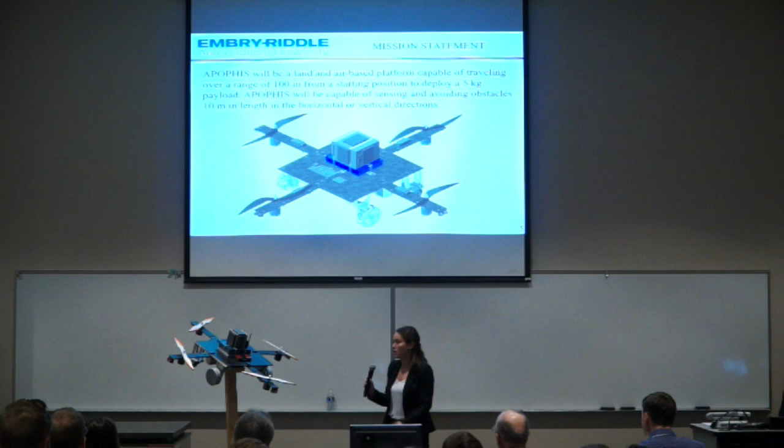Now I will discuss the mission concept. APOPHIS will be an autonomous land and air-based payload delivery platform capable of transporting a 5-kilogram payload to a user-defined target position. APOPHIS will also be able to detect and maneuver around obstacles that are less than 10 meters in length in the horizontal or vertical directions. Shown here is our CATIA rendering, in addition to our 2-scale mock-up here.

Now I will discuss our system objectives. Primary system objectives are defined as objectives required for mission success; if these are not satisfied, it constitutes mission failure. The first states the platform should travel both on land and air to a target location. The second and third state the platform should deliver a 5-kilogram payload to a target location and then return to the starting location without the payload.

The fourth and fifth objectives state the platform should travel a distance greater than 50 meters but less than 100 meters from the starting location. The sixth primary objective states the mission should have more than one form of independent propulsion, in addition to more than one method of attitude determination and control. The ninth primary objective states the platform should complete the mission inside the mission envelope.

Now moving on to our secondary system objectives, defined as expected but not required for mission success. The first two state the platform should be able to maneuver around obstacles less than 10 meters in length in the horizontal or vertical directions. The third states the platform should achieve an altitude less than 25 meters during the course of the mission.

Now moving on to our tertiary objectives, defined as desired but not required for mission success. The first states the platform should complete the mission in full autonomous mode, and the second is that the platform should be fully validated by April 28, 2017, the date of our system validation review. Now moving into our concept of operations, as mentioned, APOPHIS is broken into 4 subsystems.

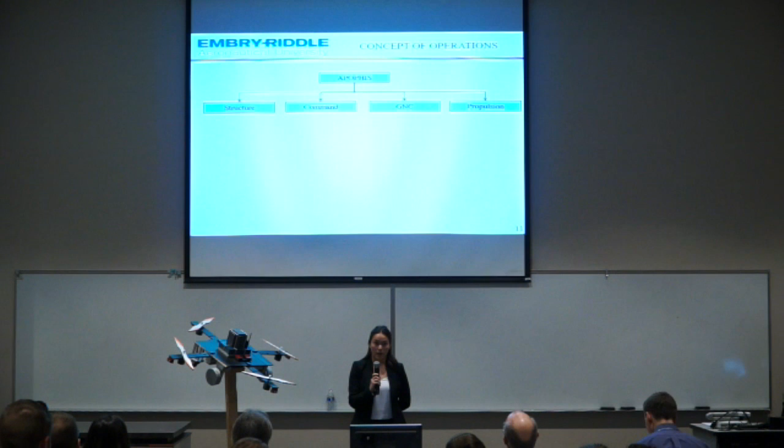And now here is an animation. This animation shows two types of obstacles that APOPHIS will be able to maneuver around. The first is an obstacle that is less than 10 meters in the horizontal direction but more than 10 meters in the vertical direction, shown here. The second obstacle is greater than 10 meters in the horizontal direction but less than 10 meters in height, shown there. The animation begins with APOPHIS leaving the starting location.

As it approaches the first obstacle, it will detect it when it is perpendicular to it, turn to maneuver around the obstacle. Once it is around the obstacle, it will return to the center position to continue on its trajectory.

As it approaches the second obstacle, now switching views to see behind the obstacle, it will turn one direction and travel 10 meters. At that point it will still detect the obstacle, so it will return to the middle position where it first sensed the obstacle and travel 10 meters in the opposite direction. At that point it will still sense the obstacle, so it will return to the center position where it first sensed the obstacle and fly over the obstacle to continue to the target position, where it will deploy the payload.

And then maneuver back to the starting location using an optimal route.

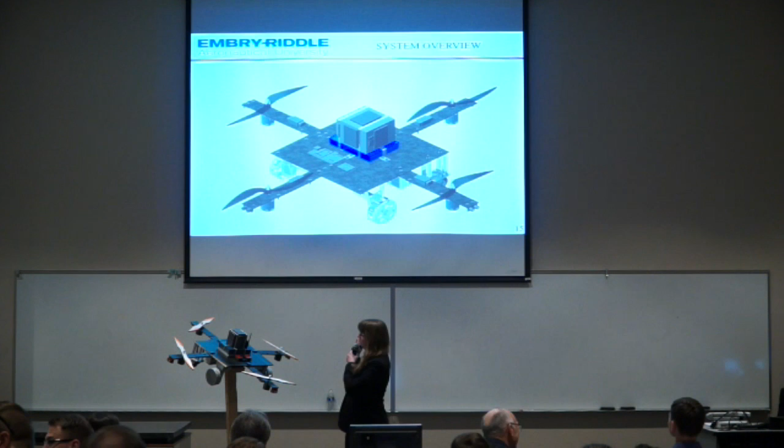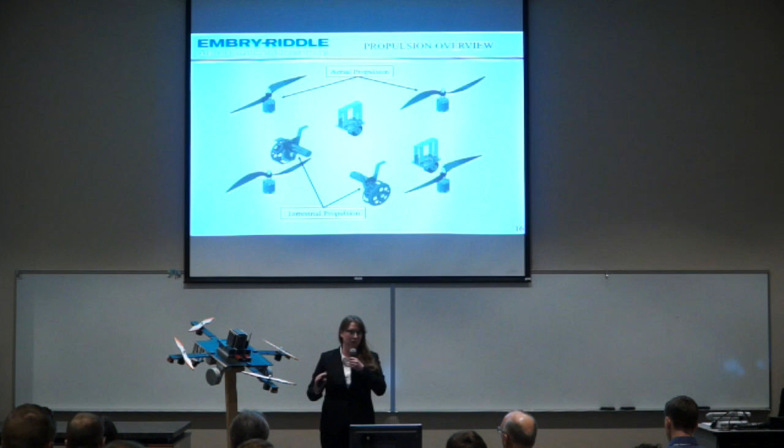So once again, this is the overview of our CATIA model, but I will be referencing our mock-up. First is the propulsion subsystem. Propulsion is first because it really is what drove our design. We have 4 aerial motors, including counter-rotating propellers connected on top, located at the end of each propeller strut. The terrestrial component is the ground motors, located in the front to give us front wheel drive, along with differential steering underneath the platform. The back wheels are freely rotating wheels to allow us to turn.

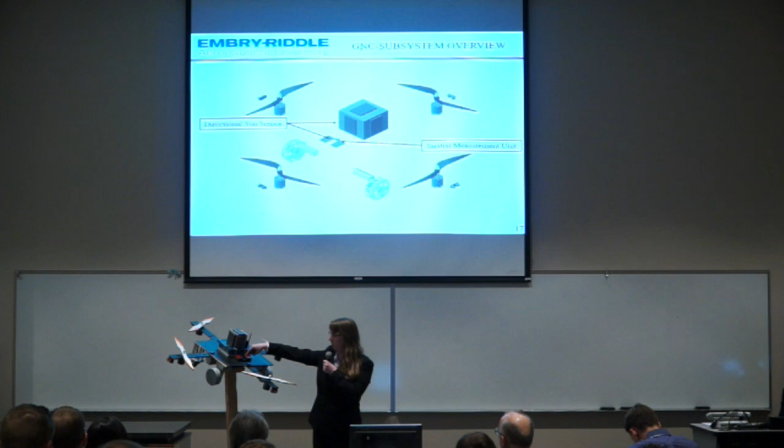Next is GNC. GNC is in charge of attitude determination, attitude control, and guidance and obstacle detection. For attitude determination, they have an IMU located on the electronics panel in the center of the plate, and a solar panel array located on top of the batteries so there will not be shadows cast on it, which gives us a sun vector. For control, they use propulsion's motors: the air motors for aerial control and the ground motors for ground control. For obstacle detection, we have 4 ultrasonic sensors, one located at the end of each propeller strut. And for guidance, we have a GPS located on the central electronics board.

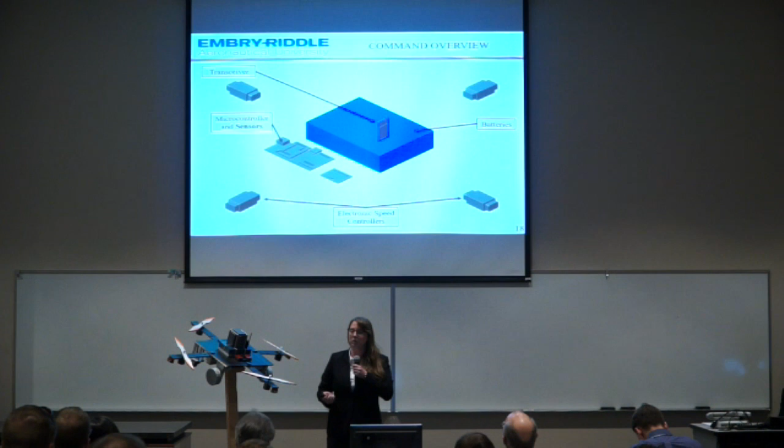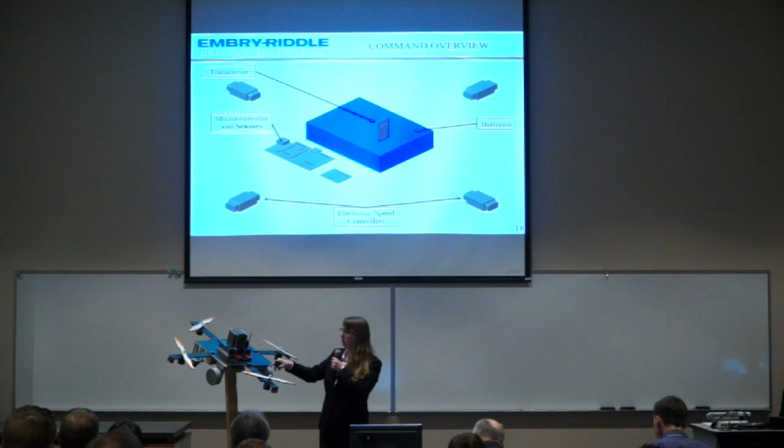Command is in charge of powering the system, data processing, and communicating with the ground station. They power the systems using 4 batteries located in the middle of the plate. For data processing, they use a microcontroller located here. For communicating with the ground station, they have a radio located here next to the solar array. They also have electronic speed controllers to regulate the voltage that goes to our air motors to ensure we get the correct amount of thrust.

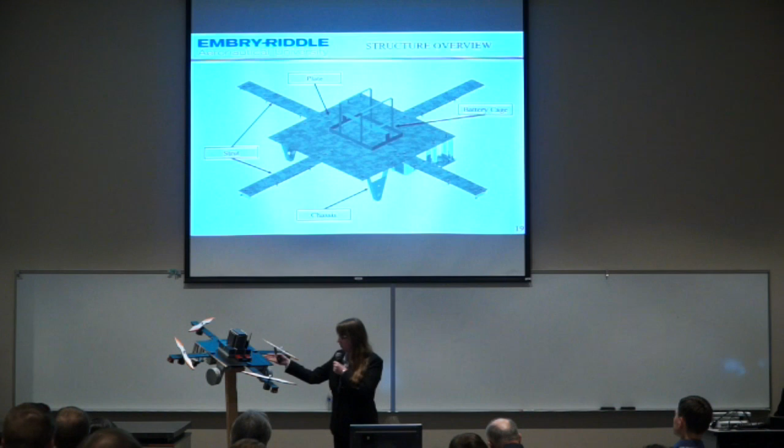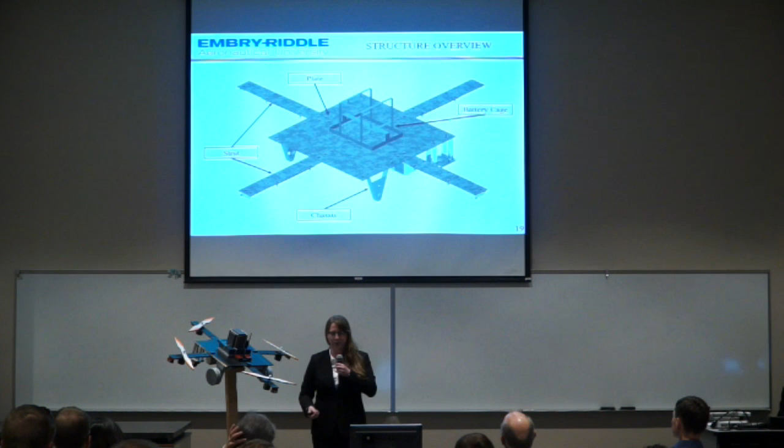Last is structures. Structures is in charge of containing all the other systems. It has four-ish main components: the main plate and the propeller struts, both made of carbon fiber, and the wheel chassis and payload struts, located underneath the platform, made of aluminum 6061. We are also in charge of the payload and deploying the payload bay. This is done with solenoids located on the payload struts, hooked into a payload bay that will release when we reach our target location. All of this will be discussed in more detail within the individual subsystems.

At this time, I would like to introduce Sean Gilman for the propulsion subsystem.

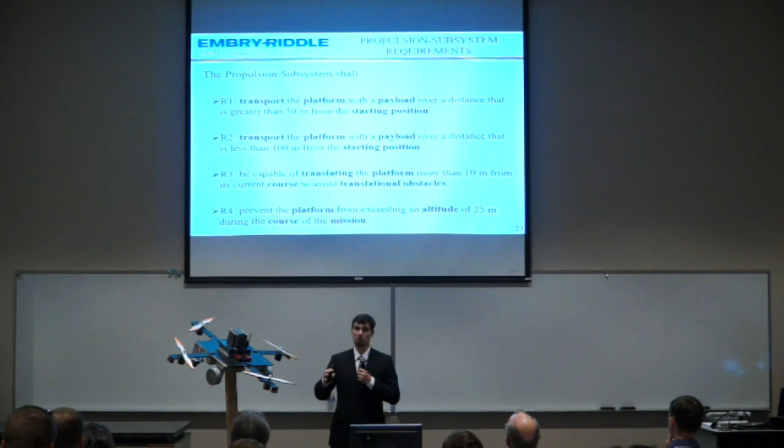Now I'll talk about the propulsion subsystem definition. First, the propulsion subsystem must move the platform with the payload more than 50 meters but less than 100 meters from the starting position. Next, it must be able to translate at least 10 meters out of its expected course, either horizontally or vertically, to avoid any obstacles. And it must keep the platform under 25 meters above ground level throughout the entire mission.

Next, the propulsion subsystem must provide 27 kilogram force of thrust. This is to account for a factor of safety of 1.5, allowing us to accelerate and maneuver around aerially. Then it must provide 0.1195 newton meters of torque for the ground component, allowing us to accelerate and maneuver on the ground.

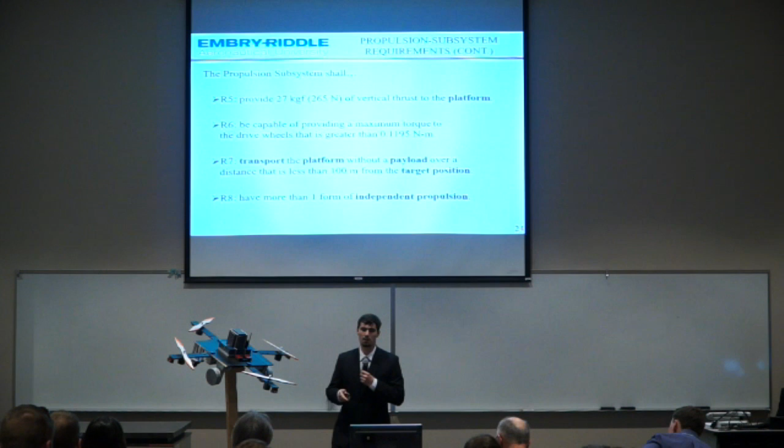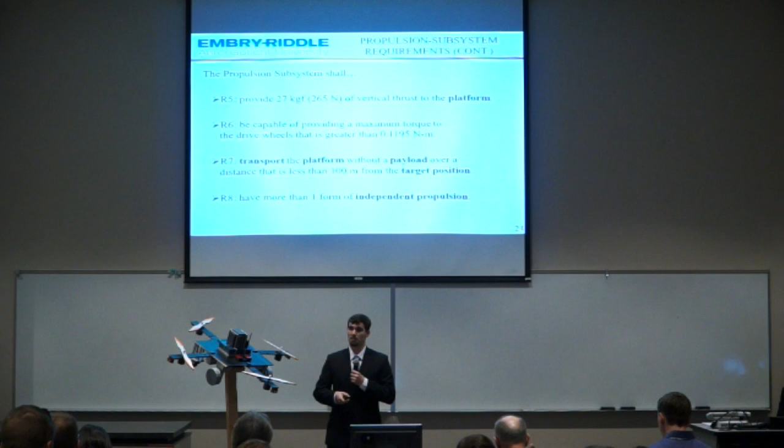It must transport the platform without the payload from the target position back to the starting position, at least 100 meters or under 100 meters. And we must have more than one form of independent propulsion. So from the propulsion subsystem, we derive two different components: the aerial and the terrestrial components.

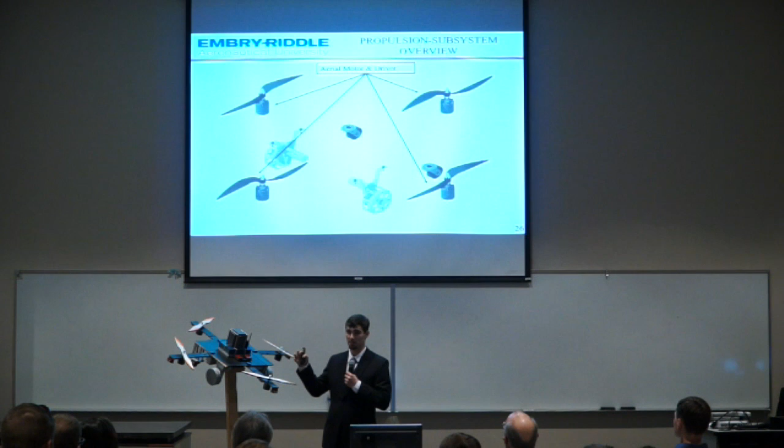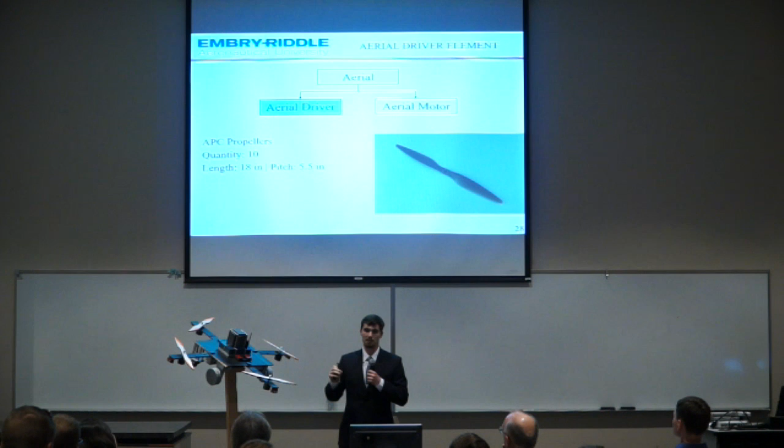Once again, this is the aerial component. For the driver, we selected the APC 18 by 5.5 inch diameter blades. We're getting 10 of these: the first 8 are for the propellers, and we have an extra set so if any break we can replace them. The other 2 are for testing to failure, to see where they'll start to break, since we're testing at the higher end of its factor of safety.

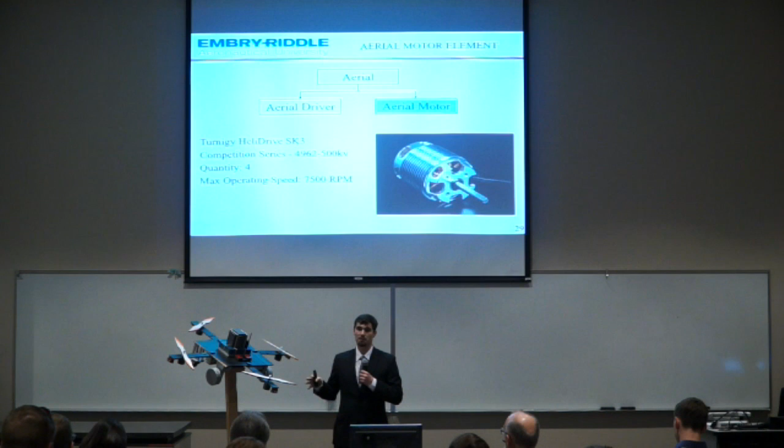For the aerial motor, we chose the Turnigy Helidrive SK3. We're going to be running this at 7,500 RPM max.

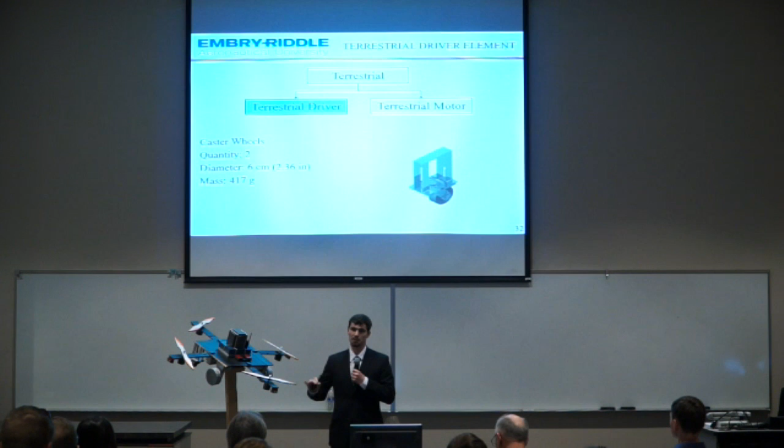This is the terrestrial component. For the terrestrial driver, we chose to mill out our own wheels on the front out of aluminum 6061. For the back, we chose caster wheels, so we can do differential front steering and it can turn freely. For the motor, we chose the Anaheim Automation motor, courtesy of Dr. Gentilini, and each will produce 0.0625 newton meters of torque.

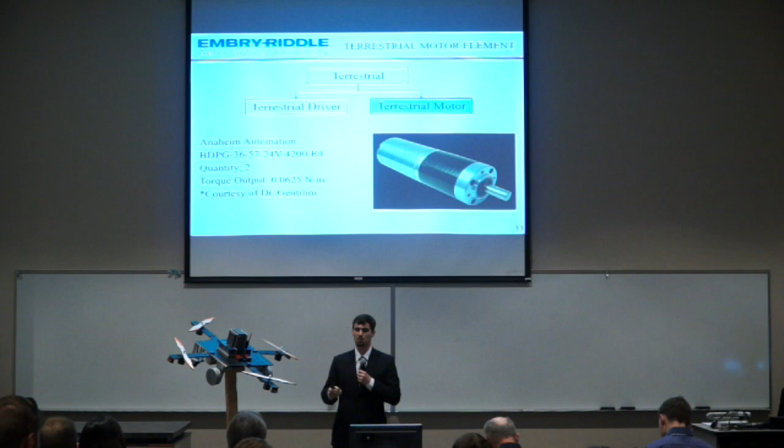Now I'll hand it off to Wesley Stein to talk about the propulsion subsystem numerical validation.

Hello, I'm Wesley Stein, and I'll be talking about the numerical validation of our propulsion subsystem. The first set of requirements deal with the range of our platform, which the propulsion subsystem is responsible for. It needs to travel between 50 and 100 meters initially to reach the target location, the same distance to come back, and it needs to be able to go up to 10 meters to get around any obstacles.

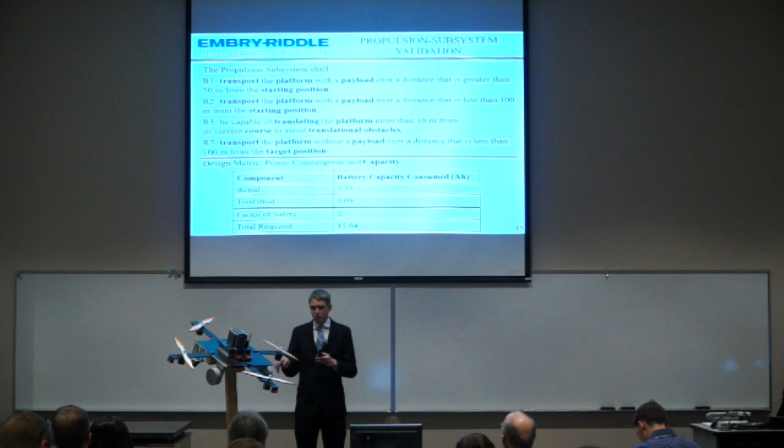The figure of merit we're dealing with here is how much energy we can supply to the motors to reach the required range. The one that consumes by far the most battery capacity is our aerial motors that drive the propellers, expected to consume 7.73 amp hours. For comparison, the terrestrial component consumes 0.09, much less power. So the aerial version has driven our power supplies, which is why there are exactly 4 batteries, one for each of the aerial motors.

We've designed this with a factor of safety of 2, which we meet. This is based on a simulated mission, and we have enough energy to complete the full mission twice in ideal circumstances, which covers that factor of safety.

The next set of requirements deals with the thrust that must be provided to lift our system with the propellers, or aerial component. Early on in the design process, we decided we need a 150% thrust to weight ratio. This isn't only a factor of safety requirement, as the extra thrust beyond 100% is required simply to maneuver the quadcopter, because maneuvering involves running some motors at less than full capacity. We researched the topic and found that 150% is the minimum to make a properly maneuverable quadcopter.

Early on, we decided our design weight would be 18 kilograms, and thus, in order to have the 150%, we have to produce 27 kilograms force of upward thrust with our 4 propellers, which is equal to 265 newtons.

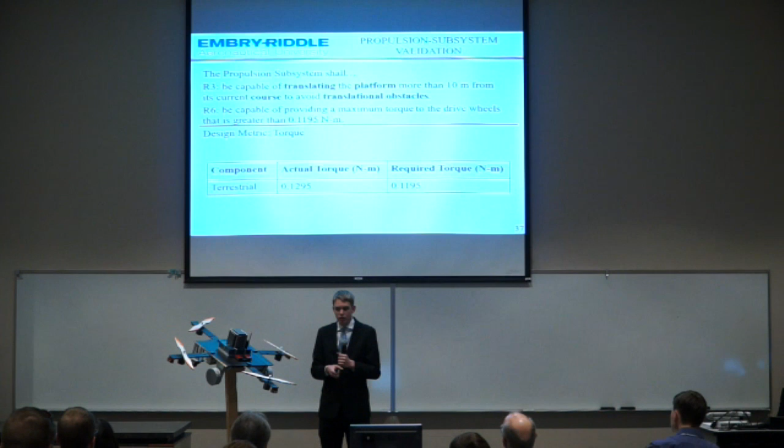The third set of requirements deals with the torque that must be produced by our ground wheels in order to maintain the proper acceleration at a grade of up to 2%. This requires a calculated torque of 0.1195 newton meters. The provided torque is 0.1295, which fulfills that requirement also.

This table simply shows the different requirements and how we have numerically validated them. We used a different kind of computer simulation for each of these, where we ran through a simulated mission and integrated the consumption of battery capacity and power, while also measuring the required thrust and torque in order to determine that we have numerically met all of these requirements.

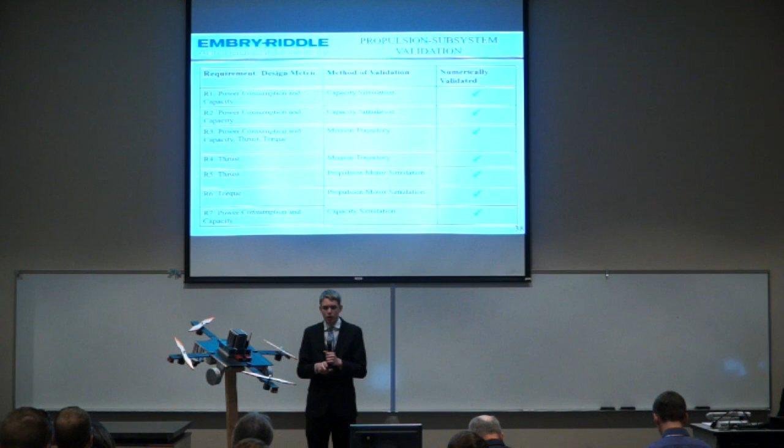I will now introduce Abigail Kuto, who will be talking about our guidance, navigation, and control subsystem.

Thank you, Wesley. My name is Abigail Kuto, and I'll be discussing the Guidance, Navigation, and Control, or GNC subsystem. Joining me in the GNC subsystem is Damien Barraza and Christopher Klein.

First, for the GNC subsystem definition, the requirements are listed above. First, the subsystem shall navigate the platform to a point that is less than 2.75 meters from the specified position. Next, the GNC subsystem shall complete the mission using less than 16 amp hours of battery capacity. The subsystem shall limit the altitude of the platform to be less than 25 meters above ground level.

Continuing on, the GNC subsystem shall navigate the platform around translational obstacles that are less than 10 meters in either length or height during the mission. The last few requirements state that the GNC subsystem shall have more than one method of attitude determination and attitude control for the system.

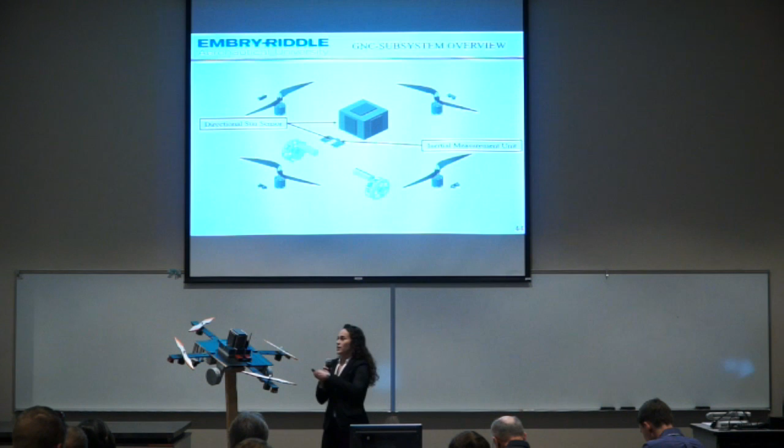Pictured above is a CATIA rendering of all of the elements that comprise the GNC subsystem. The first component is the attitude determination component. There are 2 elements which serve as the 2 methods of attitude determination for the platform. The first is the directional sun sensor, which has an assembly of 5 solar cells mounted on top of the plate here.

There's also an accelerometer mounted on the electronics board here. The second method of attitude determination is the inertial measurement unit, also located on the electronics board. For the attitude control component, there are also 2 elements which serve as the 2 methods for attitude control for the system.

The first element is the air-based controller, which has 4 motors and propellers located on the ends of the propeller struts. The air-based controller element is used to control the attitude of the platform during flight.

The second element is the ground-based controller, which has 2 motors on the ground, driving 2 gear systems, and 2 wheels. Controlling each motor independently enables us to use speed differential front-wheel drive to steer the platform to the target position and around obstacles.

Lastly, the guidance component is responsible for navigating the platform to the target position where it will deliver the payload, and also navigating the platform around translational obstacles. The first element is the position sensor element, located here on the electronics board, which is responsible for determining the current position of the platform.

Next is the obstacle detection sensor element, which has 4 sensors. The first is located on the front propeller strut facing forward. The next 2 are located on the left and right propeller struts, both facing outward. The placement of these sensors enables the platform to detect when it approaches an obstacle perpendicular to the front face, so it may turn and navigate parallel to that obstacle.

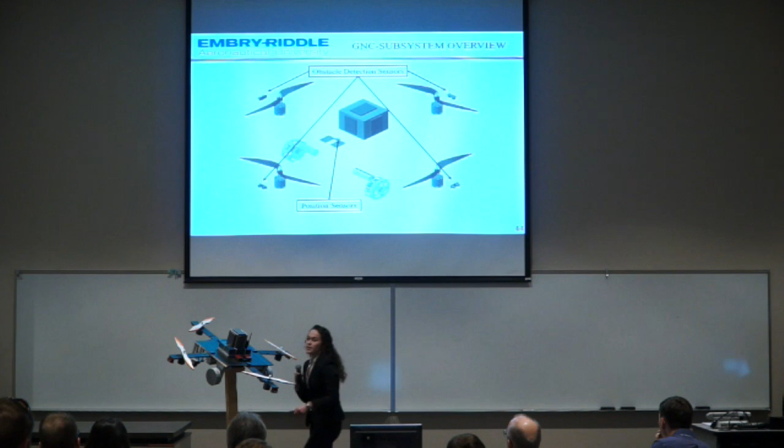Once it passes the obstacle, it can turn again and maneuver around the obstacle to continue to the target position. The last sensor of the obstacle detection element is located on the back propeller strut. It's facing downward, which enables us to detect when we've maneuvered over an obstacle, so we may continue the descent and continue to the target position.

All of these elements comprise the 3 components of the guidance, navigation, and control subsystem.

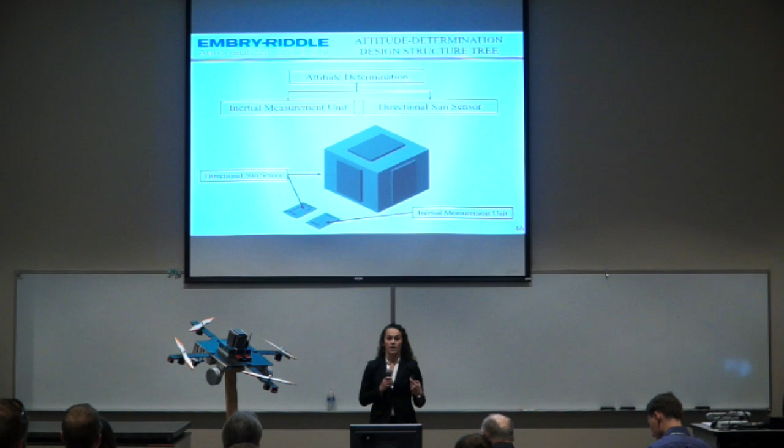First, the attitude determination component has 2 elements: the inertial measurement unit and the directional sun sensor. The inertial measurement unit we've chosen is the BMI 160, which has a 3-axis accelerometer and a 3-axis gyroscope. We'll also use an external 3-axis magnetometer located on the sensor booster pack shown above. That magnetometer gives us a heading angle, used to determine our attitude and help us navigate throughout the mission.

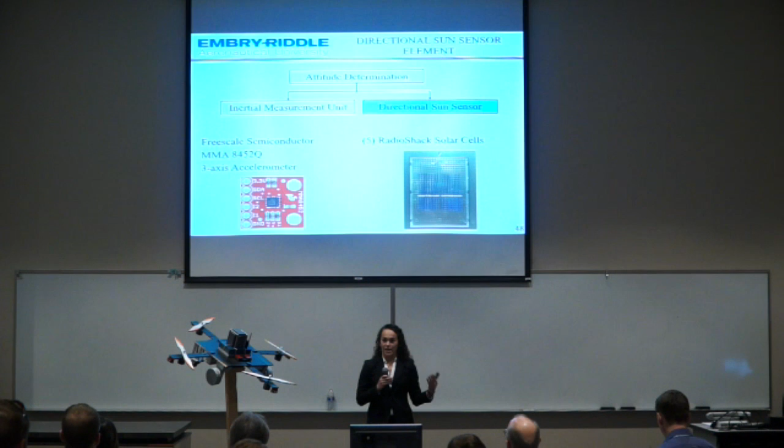The second element of the attitude determination component is the directional sun sensor. We'll be using 3 RadioShack solar cells on this assembly, which give us a vector from the platform to the sun. The second vector measurement is the 3-axis accelerometer located on the electronics board, which gives us a gravity vector downward. These 2 vector measurements give us the second method of attitude determination for the platform.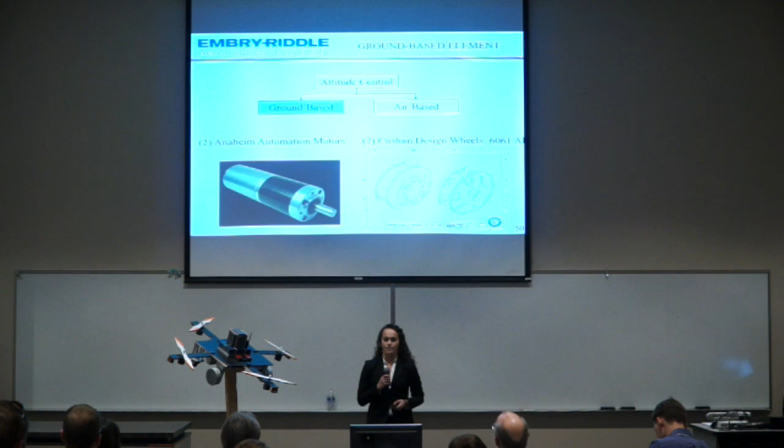Moving on to the attitude control component, there are 2 elements: the ground-based controller and the air-based controller. For the ground-based controller, we've chosen to use the hardware already picked out by the propulsion subsystem as our actuators to steer the platform on the ground, consisting of the motors and wheels shown above. For the air-based controller, again for our actuators, we will use the hardware chosen by the propulsion subsystem: the 4 motors and their propellers.

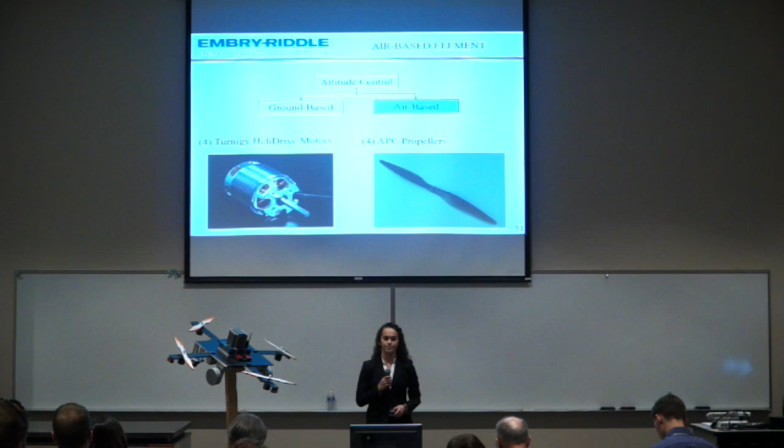Lastly, the guidance component has 2 elements: the position sensor and the obstacle detection sensor. For the position sensor, we'll use a GPS receiver, which gives us latitude, longitude, and altitude of the platform, giving us a current position. We'll also use the temperature and pressure sensor included on the sensor booster pack with the IMU. This redundant measurement allows us to calculate the current altitude, so we can monitor how high we're going when trying to get over an obstacle.

Lastly, for the obstacle detection sensor element, we have chosen to use 4 HCSR04 ultrasonic sensors, which can detect when an obstacle is up to 4 meters away, perpendicular to the face of the sensor.

With that, I'd like to pass it on to Christopher Klein to discuss the GNC subsystem numerical validation. Thank you, Abigail. My name is Christopher Klein. I'll be going over the GNC subsystem numerical validation.

The design metric for requirement 1 is positional accuracy. The first element is the GPS position sensor, which has an accuracy of 2.5 meters. Next, the ground-based controller has a steady state error of 5.0 times 10 to the negative 14 meters. What this means is that according to our controller, the platform will get within that range plus or minus of the input location. We are trying to determine if this will be negligible, but this should satisfy our 2.75 meter requirement.

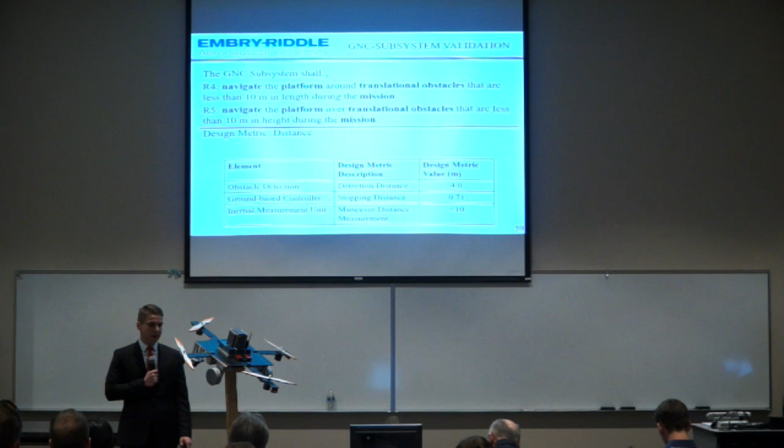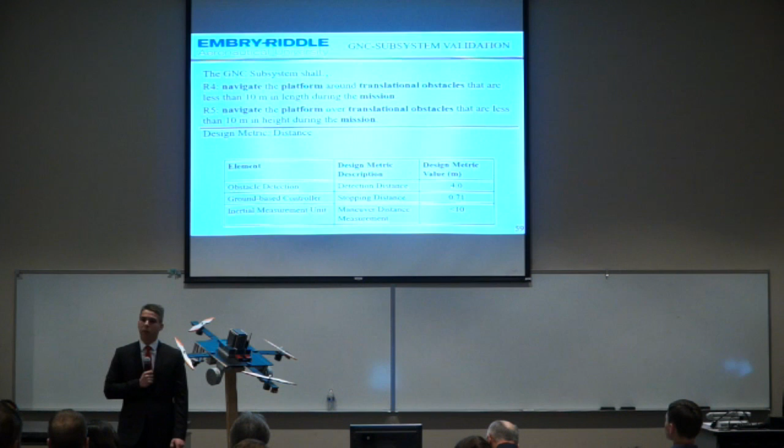Requirements 4 and 5 have a design metric of distance. The first element is obstacle detection, using ultrasonic sensors. They will sense an obstacle when it is 4 meters away. We then have a stopping distance, which comes from our simulated controller, of 0.71 meters. This will put us at 3.29 meters from the obstacle, which should give us plenty of room to turn.

Numerically, the platform should turn with a turning radius of 0. However, we realize in actuality it will have small deviations. We will then start traveling 10 meters along the obstacle. We intend to measure this 10 meters using the IMU, which gives us an acceleration vector. Integrating this, we can get position. The error in the IMU, when you integrate it for position, will grow over time and distance. So we have not yet been able to numerically validate whether this will work, seeing as we do not yet have the IMU.

The design metric for requirement 6 is the number of attitude measurements. The first element is the IMU, the inertial measurement unit. This gives us an acceleration vector, an angular velocity vector, and a heading angle. From this, we get one attitude measurement.

We then have the directional sun sensor. This gives us a sun vector, as well as a gravity vector, giving us 2 attitude measurements, satisfying our more-than-one requirement. Requirement 7 has a design metric of number of actuator types.

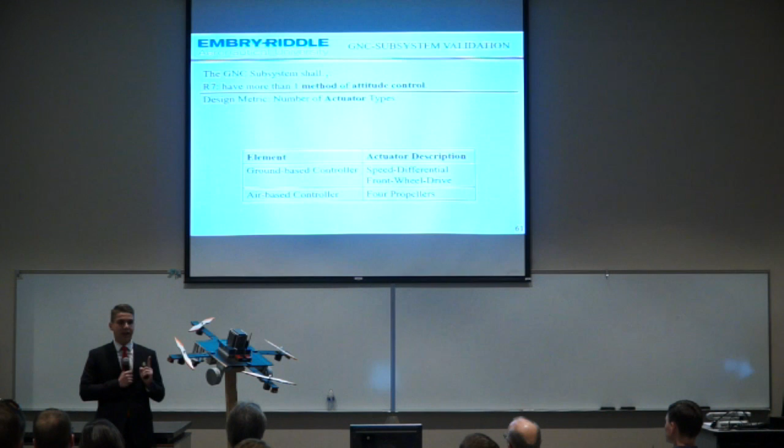First is the ground-based controller, which has 2 separate wheels powered by 2 separate motors, giving us 1 type of actuator. Then the air-based controller, which has 4 propellers, all powered independently by 4 separate motors, supplying us with our other type of actuator. This gives us 2 types, satisfying our requirement that we have more than 1 type.

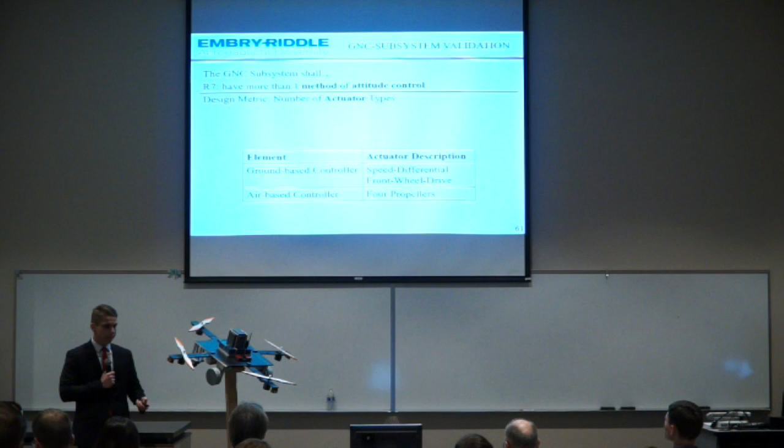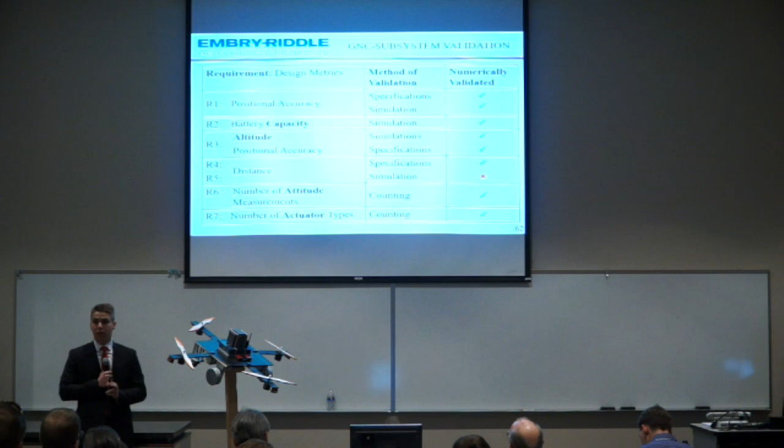Here you can see what requirements have been numerically validated. All but the distance requirement have been numerically validated. The reason for that is we have not integrated all of our simulations together yet, so while we are able to numerically validate each maneuver, we cannot validate it as one continuous mission. And once again, the IMU being used to measure distance along 10 meters going along the obstacle has not been able to be validated yet.

With that, I'll pass it to Brandon Clefman, who will go over the command subsystem.

Thank you, Christopher. My name is Brandon Clefman. I will be discussing the command subsystem. First, I would like to introduce William Hainsworth, the other member of my subsystem. I'll be going over the command subsystem definition.

The requirements for our command subsystem: first, the communication range between the command subsystem and the ground station shall be greater than or equal to 200 meters. The command subsystem shall communicate with the ground station at an update rate greater than or equal to 1 hertz, and the number of interface pins on the command subsystem shall be greater than or equal to 42.

In addition to that, we have the command subsystem shall provide a nominal voltage of 22.2 volts, an instantaneous current supply greater than 321 amps, and a battery capacity greater than 16 amp hours.

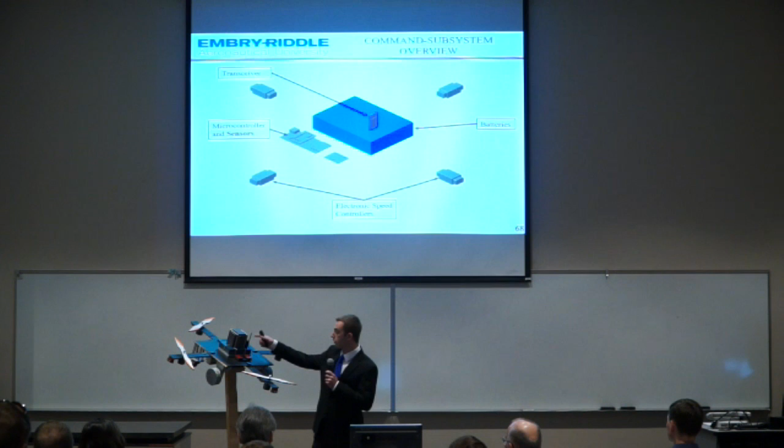We also have the microcontroller unit, located directly in front of the batteries, which will perform all of the onboard computations for the system. Electronic speed controllers for the aerial motors are located on each of the struts before the propellers. And then lastly, we have the transceiver radio, located above the batteries to get better communication with the ground station.

For the command subsystem, we derive 3 major components. First is the data handling component. Then we have the power component, and lastly, we have the ground station component.

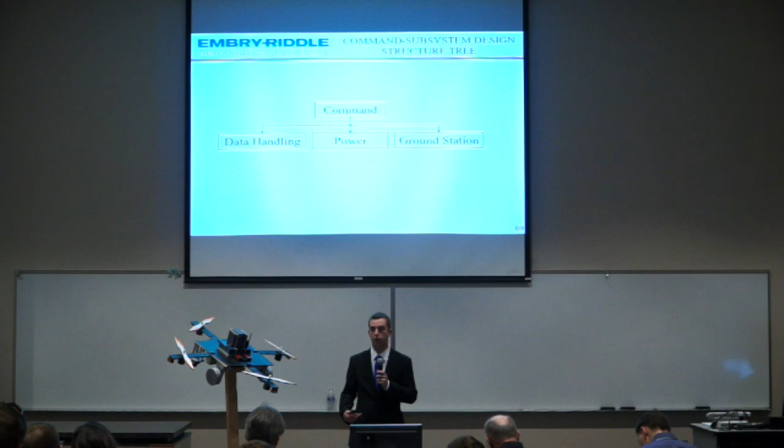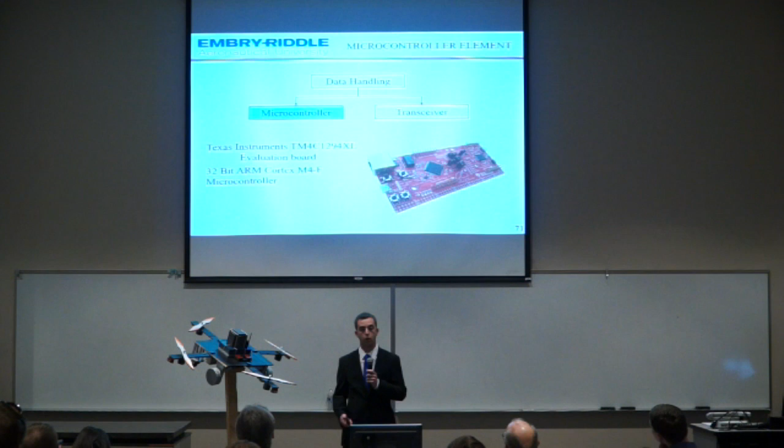For the data handling component, we have derived 2 elements: the microcontroller element and the transceiver element. For the microcontroller element, we will be using the Texas Instruments TM4C evaluation board. This particular board has a 32-bit ARM microcontroller power unit. As for the transceiver element, we'll be using the 3D Robotics Radio version 1.

This particular unit has been provided by Dr. Brian Davis in the computer engineering department. It has two components to it. The first is this one located here, which has the pins; that will be connected to the microcontroller through wires. The second is this USB part here, which will actually plug into a laptop and allow us to communicate to the laptop over serial interface.

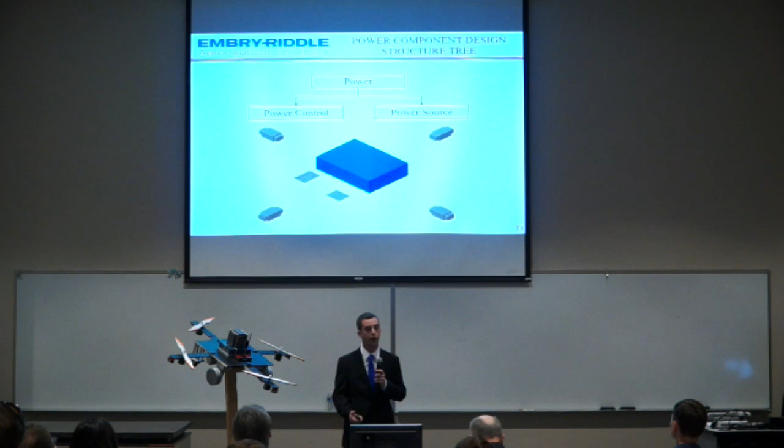For the power component, we have derived two elements: the power control element and the power source element. For the power control element, the aerial motors will use electronic speed controllers, again located on each of the 4 propeller struts. For the ground motors, we will be using 4 half-H bridges, which will allow us to control the motors on the ground, which are actually brushed instead of brushless.

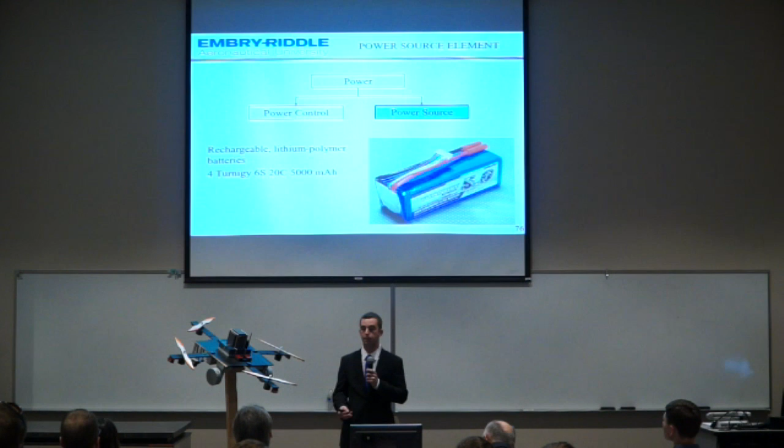As for the power source, we will be using 4 Turnigy 6-cell 20C 5,000 milliamp hour batteries. Again, these will be connected in parallel, giving us a total of 20 amp hours of battery capacity.

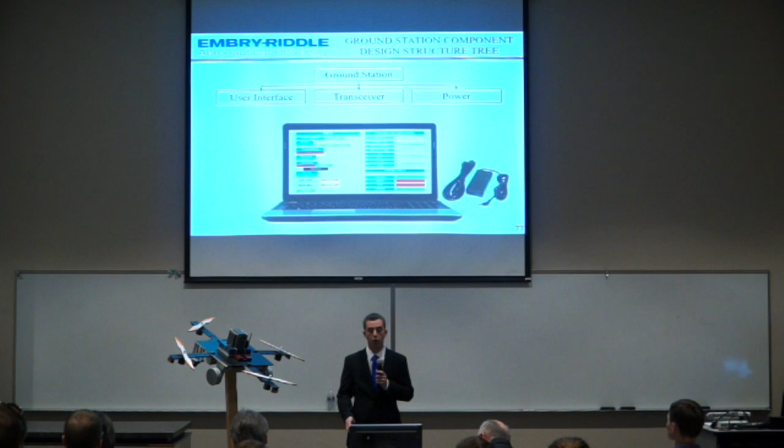For the ground station, we have derived 3 elements: the user interface element, the transceiver element, and the power element. We will be using a standard laptop such as this for our ground station.

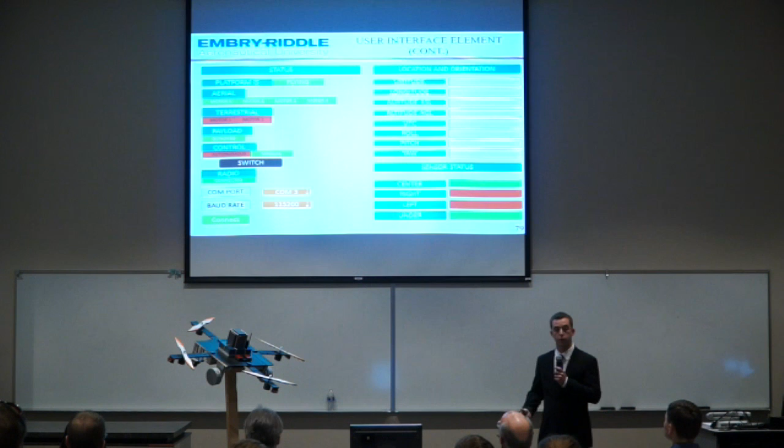For our user interface, we have designed an initial user interface, shown in the top left. This is all of our status information, whether the platform is flying or driving, and which motors are currently operational. In addition, we have whether or not the vehicle is being driven manually or autonomously.

Down in the bottom left, we have designed the buttons to allow us to connect from the PC to the radio, which will be plugged into the laptop. On the upper right, we have information on the current location and orientation of the platform in real time, giving us GPS position and altitude, as well as roll, pitch, and yaw during the mission. Lastly, on the bottom right, we have the sensor status from each of the 4 ultrasonic sensors, indicating whether an obstacle is being detected by each.

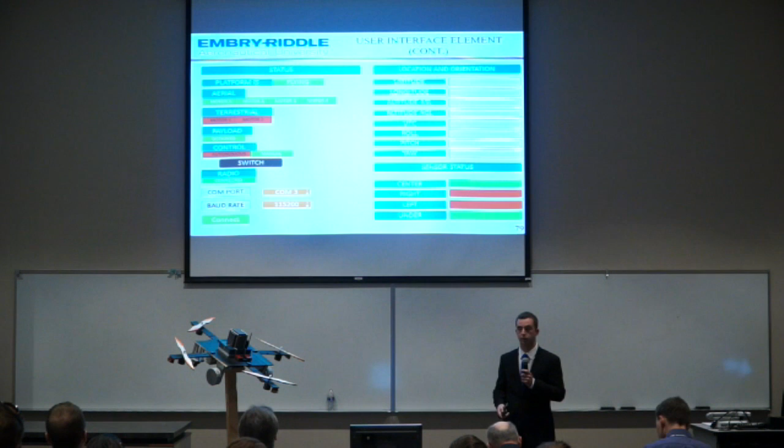Next, we have the transceiver element. Again, this is the 3D Robotics Radio version 1, provided by Dr. Brian Davis. The unit plugging into the laptop will be the piece with the USB. For power of the ground station, we'll be using the laptop battery as well as a standard AC power supply if necessary.

At this time, I would like to pass it to William Hainsworth to discuss the command subsystem numerical validation. Thank you, Brandon. My name is William Hainsworth, and I'll be discussing the command subsystem numerical validation.

For our first requirement, our design metric was the communication range. Our desired communication range was 200 meters. The radio we have has a proven range of 1,000 meters, and we will be able to use that for our communication. Our second requirement's design metric was the update frequency and data rate we would need to communicate between our platform and ground station.

The packet size that we expect is 127 bytes, equivalent to 1,016 bits, with a 1 hertz data rate desired. So a desired total bit rate of 1,016 bits per second is required. The radio we've chosen has a capacity of 250,000 bits per second.

For our third requirement, we have a design metric for the number of interface pins. These pins are responsible for communication between all of our connected components, such as the motors and sensors. Our desired number is 42 pins, and the microcontroller we've selected has 80 pins.

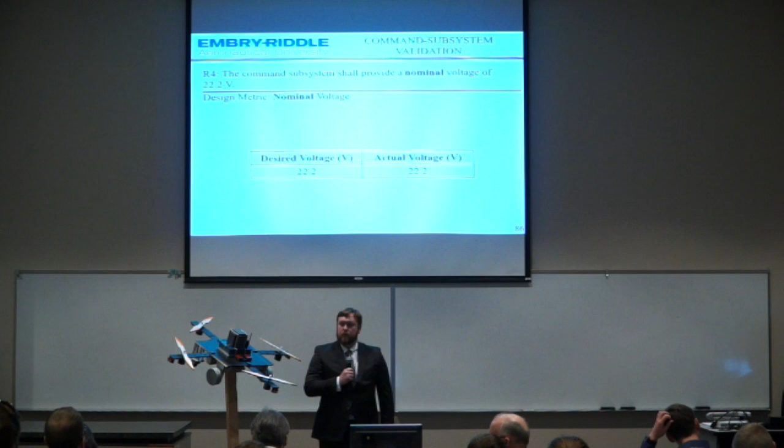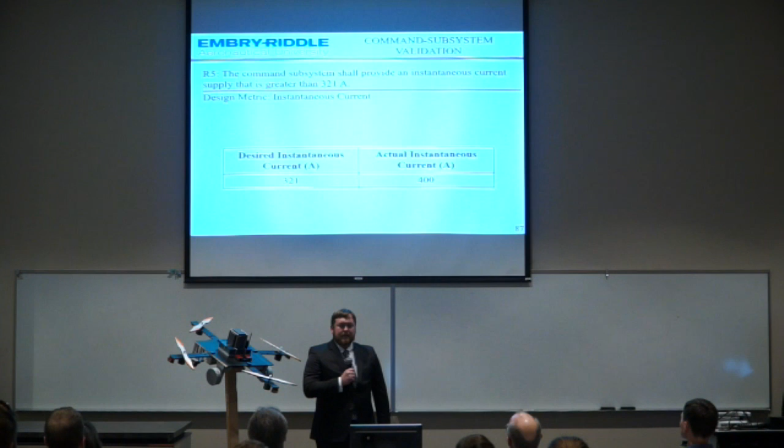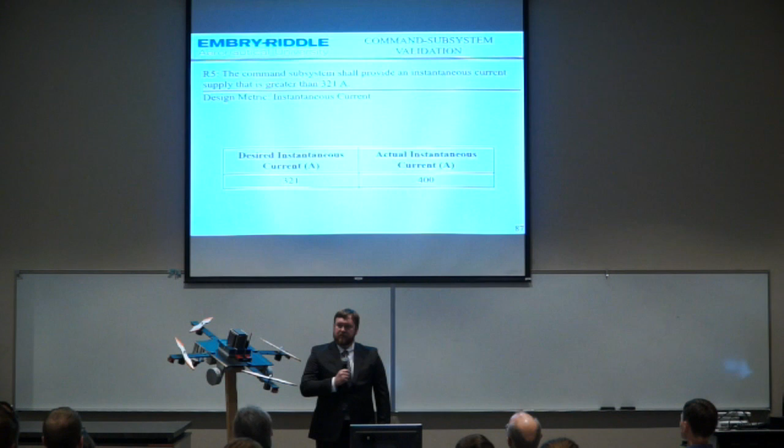For our fifth requirement, the design metric is the instantaneous current available to all connected components on our platform. The desired instantaneous current is 321 amps, if we are running all components at maximum power during the mission. The actual instantaneous current supplied by the 4 batteries we've selected is 400 amps.

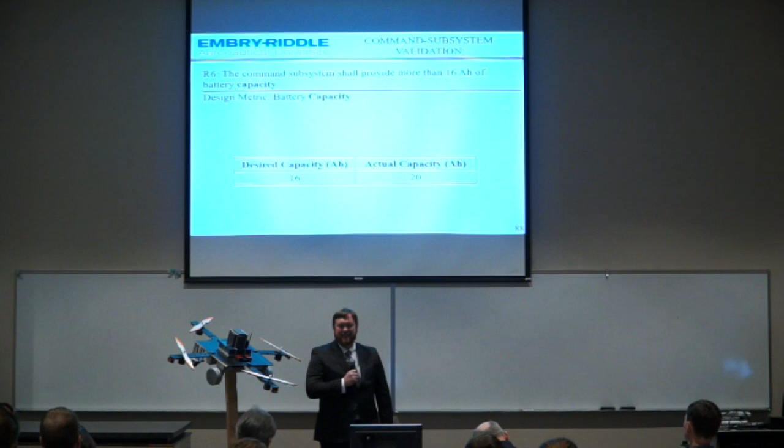For our sixth requirement, our design metric is battery capacity. The 4 batteries we've selected will be in parallel and will produce an actual battery capacity of 20 amp hours, with a desired capacity of 16 amp hours.

Thank you, William. My name is Kaylin Hubner, and I'll be the first member to talk about the structure subsystem. With me on my team is Corinne Rotabot, team lead, and Jessica Chow.

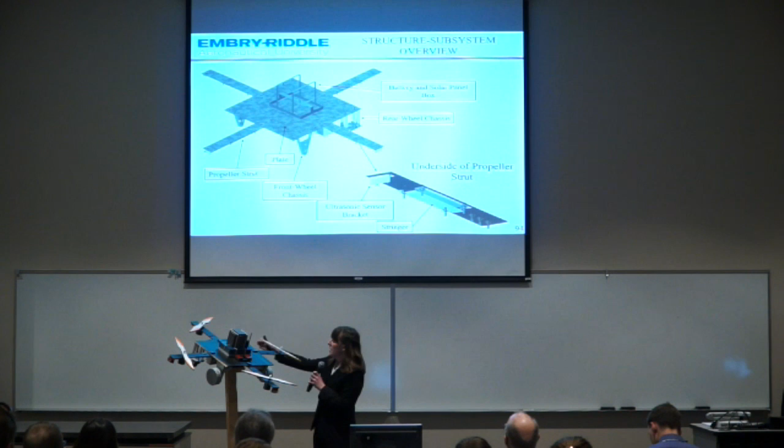Here is an overview of our system, a CATIA model above. I'll be referring to the mock-up. We have our plate, a battery and solar panel cage, a rear and front wheel chassis, and the 4 propeller struts. On the underside of our propeller struts, we have a stringer and the ultrasonic sensor brackets.

Underneath our plate, which is hard to see on our mock-up, we have the payload deployment system. We'll have 2 solenoids, each with a payload strut that it will sit on. On the solenoids is a solenoid bar, which extends into our payload bay, which will house our payload. Our structure subsystem is divided into 3 components: the body, the payload, and the payload bay. For the body, we'll be utilizing 2 different materials.

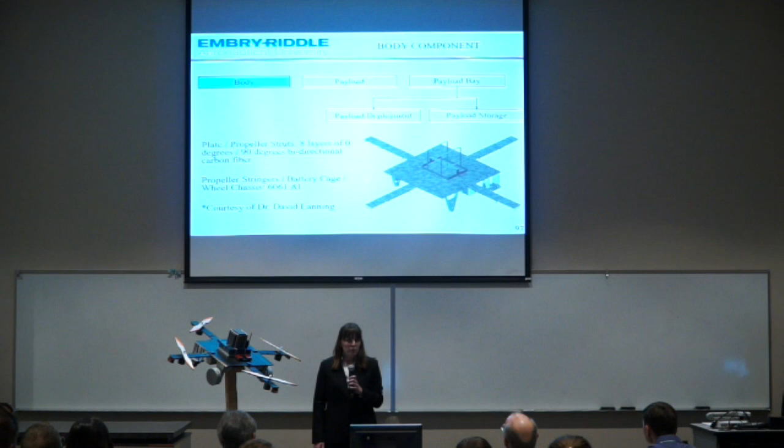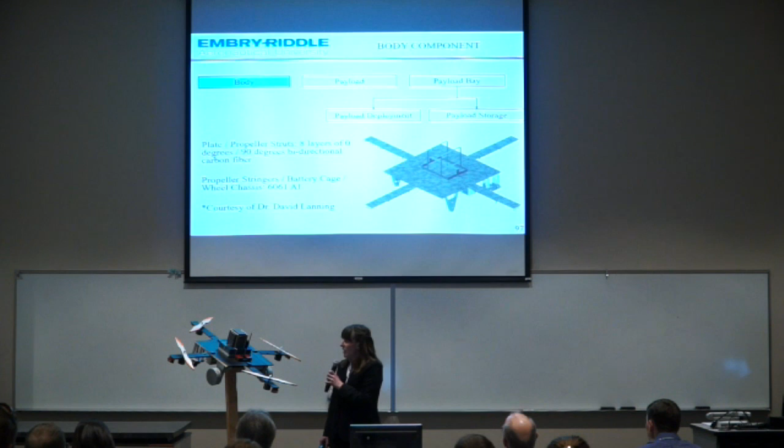For the plate and the propeller struts, we'll be using 0-90-degree bidirectional carbon fiber, provided by Dr. Lanning. For the battery cage, the chassis, and the stringers, we'll be using 6061 aluminum.

For a payload, we'll be using 2 steel cylinders, which will be provided by Embry-Riddle Aeronautical University's machine shop.

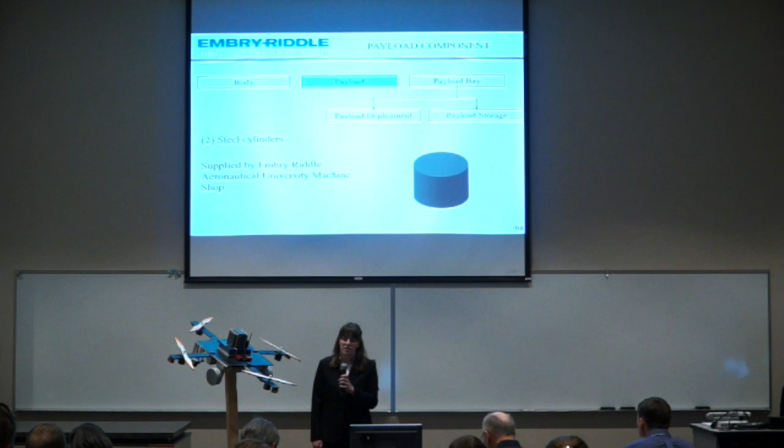For the payload bay, we have 2 elements: the storage and the deployment. For the deployment, we'll be using 2 solenoids, which we purchased from Deltrol Controls. The maximum stroke of these solenoids is 1 inch, and at 1 inch, it produces a pull force of 18 newtons, which is the minimum force that these solenoids will produce.

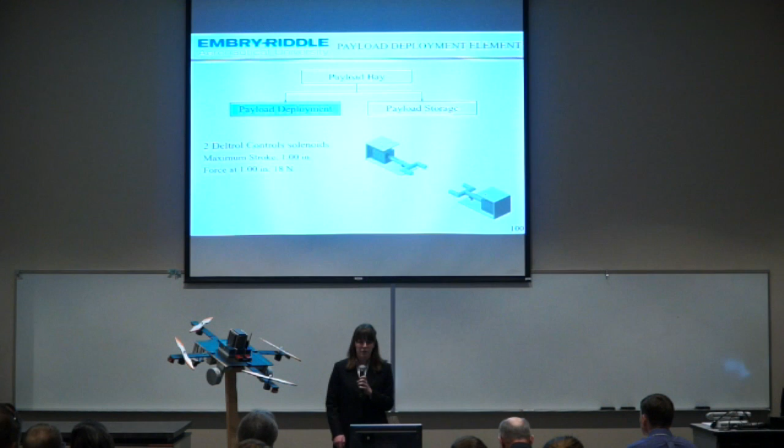And for the storage, we'll be using a plastic Rubbermaid Tupperware, which will be provided by Kernova. Now I will pass it on to Jessica Chow to talk about the structure subsystem numerical validation.

Thank you, Kaylin. My name is Jessica Chow, and I will be going over the structure subsystem numerical validation. For our first requirement, the design metric is maximum platform mass. Our aerial propulsion system can lift a maximum of 18 kilograms, so our platform must weigh less than this. Currently, it weighs 17.664 kilograms, therefore validating this requirement.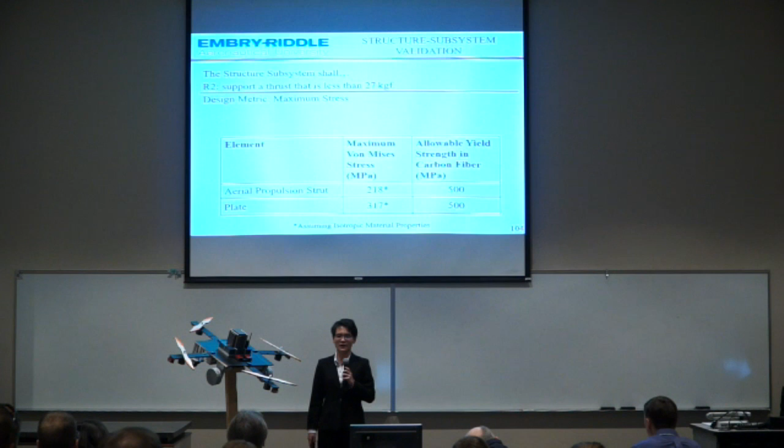Our second requirement has a design metric of maximum stress. The components for the aerial system, including the aerial propulsion strut and the plate, are made out of carbon fiber, which has a maximum yield stress of 500 megapascals. The maximum stress encountered in both of these elements is 218 and 317 megapascals respectively, which is lower than the 500 allowable yield strength. Therefore, we have met this design requirement.

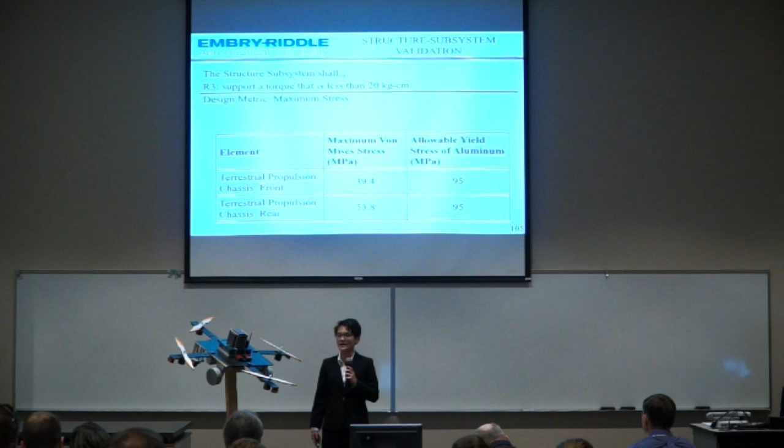For our third requirement, the design metric is also maximum stress, but this time in the aluminum parts of the terrestrial component. The allowable yield stress of aluminum is 95 megapascals, and the maximum stress encountered in these elements is 39.4 and 53.8 megapascals respectively. Therefore, we meet this design requirement.

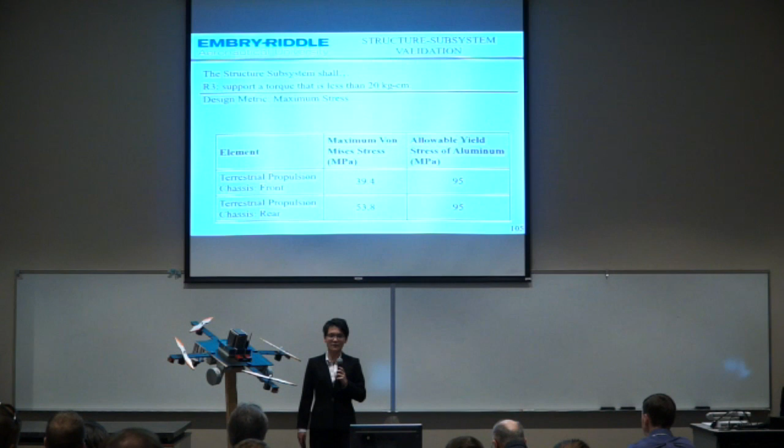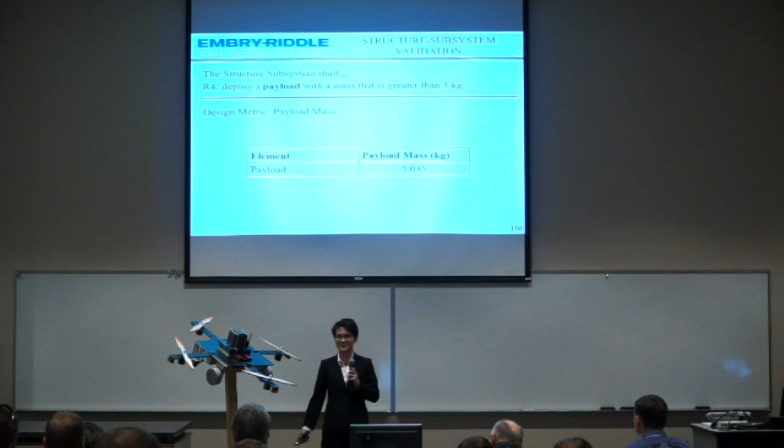For our last requirement, we must deploy a payload with a mass greater than 5 kilograms. Currently, the payload we're using is 5.035 kilograms, which is larger than 5 kilograms, validating our design requirement. As you can see from the table above, out of the 4 requirements we have numerically validated each of these.

I would now like to pass it off to Joseph Prosper, who will discuss our system numerical validation. Thank you, Jessica. My name is Joseph Prosper, and I'll be going over the system numerical validation. I'll begin by covering the system requirements.

The first 2 requirements are that the system shall deliver and deploy a payload with a mass greater than 5 kilograms, and the system shall transport a payload over a distance greater than 50 meters but less than 100 meters. The system shall transport a payload to a position no farther than 2.75 meters away from a target position. This is our accuracy when dropping off the payload.

The system shall travel over a distance no greater than 100 meters from the target position to the starting position without the payload. The system shall maintain an altitude less than 25 meters during the mission. The system shall have more than one form of independent propulsion and more than one method of attitude determination and attitude control.

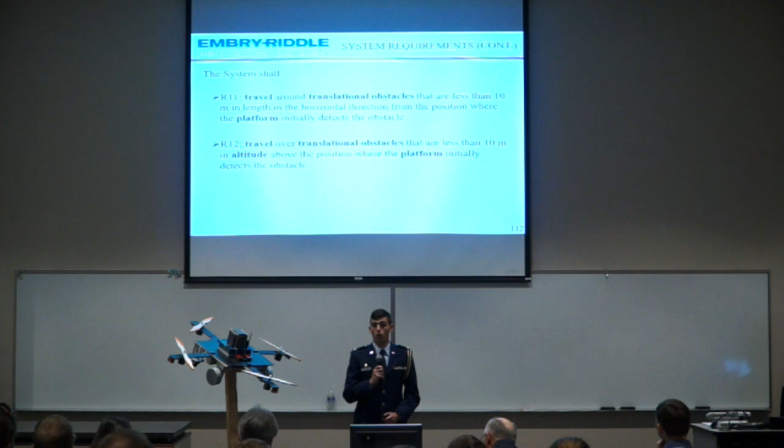The system shall travel around translational obstacles less than 10 meters in the horizontal and vertical direction. So if the system comes upon a wall less than 10 meters in the horizontal direction, it will drive around it. And if it comes across an obstacle more than 10 meters in the horizontal direction, it should be able to fly over it.

The system shall have a mass less than 18 kilograms, and the system shall not operate if the amount of precipitation for the current day will be greater than 0 inches. So our mission envelope is that there is no rain or snow that day.

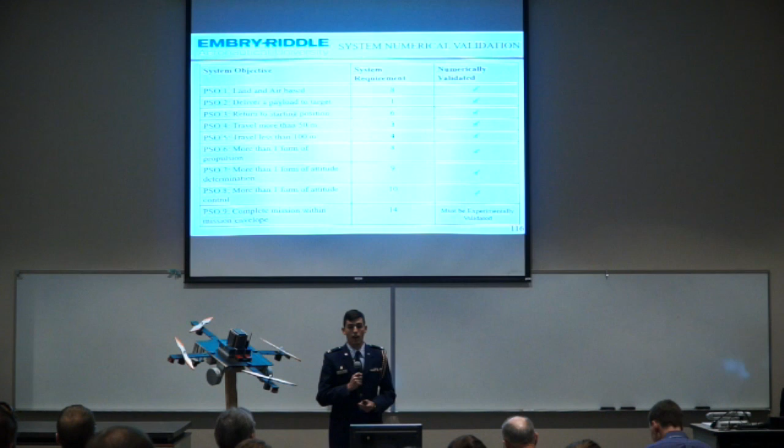On the chart above me, you will see the primary system objectives on the left, the system requirement that satisfies that objective, and whether or not it has been numerically validated on the right. These primary system objectives, to restate, are required for the mission to be a success. We have numerically validated every single one of these objectives except for the 9th, which must be experimentally validated.

Thank you, Joseph. Again, I'm Estelle Fortes, and I will be discussing the programmatics. Here is the team's labor hours, organized by category.

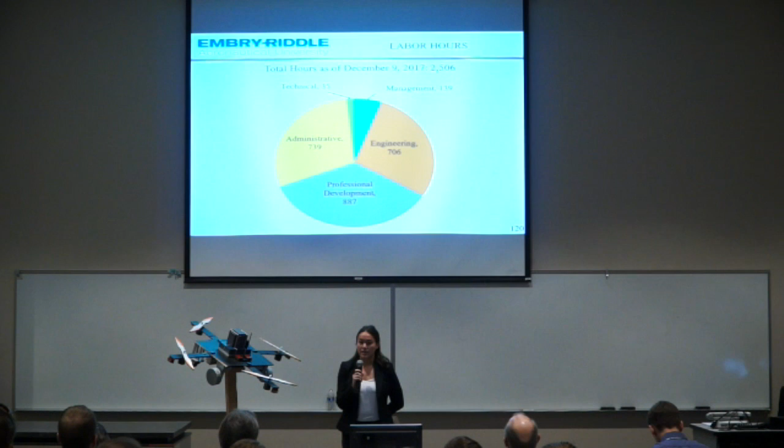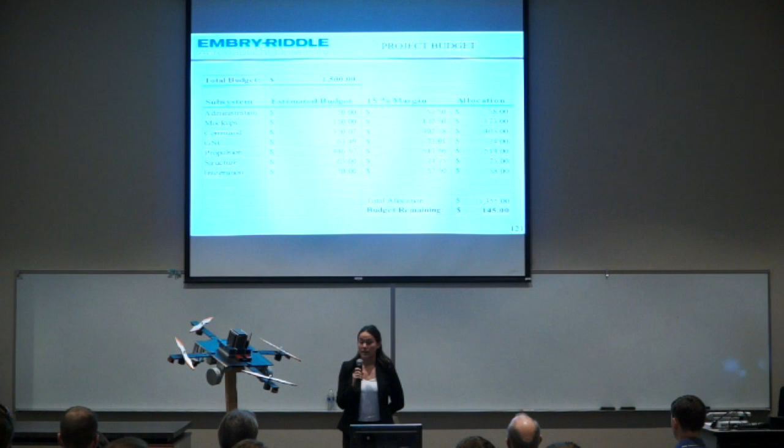At this point in our design, we have $145 remaining of our $1,500 budget allocated to us by the College of Engineering.

Now I will discuss the summary and conclusions. In this presentation, we went over our mission concept, our system definition. We talked about each of our subsystems and their numerical validation, then moved into our system numerical validation and programmatics.

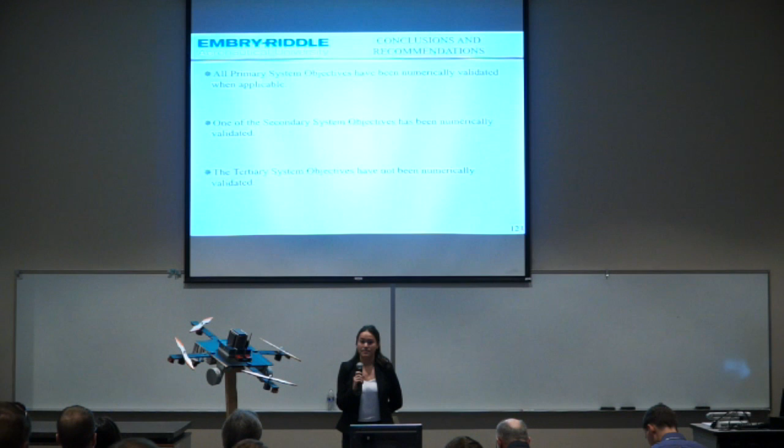In conclusion, all of our primary system objectives have been numerically validated. 1 of 3 of our secondary system objectives have been numerically validated, and neither of our 2 tertiary system objectives have been validated. As Joseph mentioned, although we have not fully numerically validated our secondary and tertiary objectives, we will be able to complete a successful mission because we have numerically validated our primary system objectives.

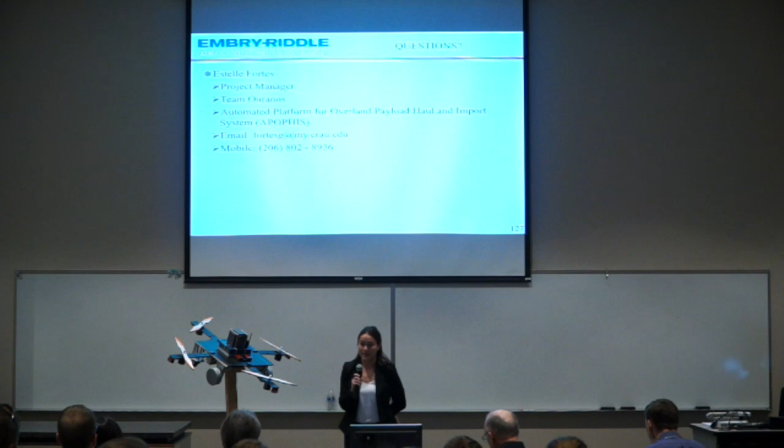To start off, I just want to say that was a pretty good presentation, and this is actually making me want to come back for the detail semester, see how it all worked out. Thank you. So, yeah, I have a couple questions for the structures team.

For your mass, do you have any mass allocated for unexpected equipment that may be added on? Because one thing I've learned is that no matter what you set for mass, there's always weight that's being added.

I'll defer this to Corinne Rodabaugh. Thank you. We have not actually allocated that much, but at the current time, all we are really missing is our wires, which we estimate to be about 100 grams, which will put us at about 17.75. And that's including, our estimated weight up here is based off the CATIA model.

I estimated all the densities that went in. Also the screws are longer than they're gonna need to be, so that will take off some weight. We have quite a few screws. So hopefully it will be lighter, but we will probably need to take into account the unexpected masses.

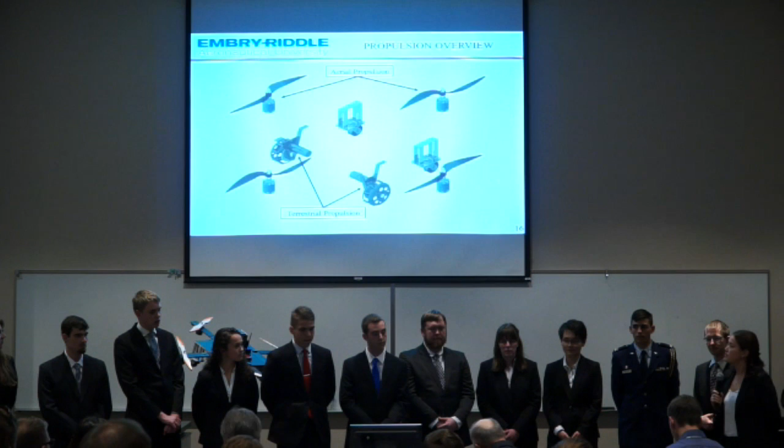Slide 28 is actually kind of a safety concern for me. APC propellers — I'm assuming those are the ceramic ones, right? They're using, according to the website, a proprietary composite blended fiber — I forget the term right now. So do you have experience with that ceramic?

So the reason I ask is because it is extremely strong. And if you're working with a really strong motor, whatever that propeller hits is probably going to break, not the propeller. So I just say that as a word of advice. You may want to consider wooden propellers, because whatever those hit, the propeller will break. Propellers are relatively cheap, and a person won't get destroyed by the propeller. I say that because we had an aircraft with a carbon fiber sandwich fuselage, and we used one of those propellers on a powerful motor, and it went right through the fuselage. Propeller's fine.

So I just say that as a warning. If you're going to have exposed propellers, those things can do some damage if they hit something, and it's kind of your fingers. Oh, your fingers come off, no problem. So I just say that because if you're going to have exposed blades, those will be dangerous.

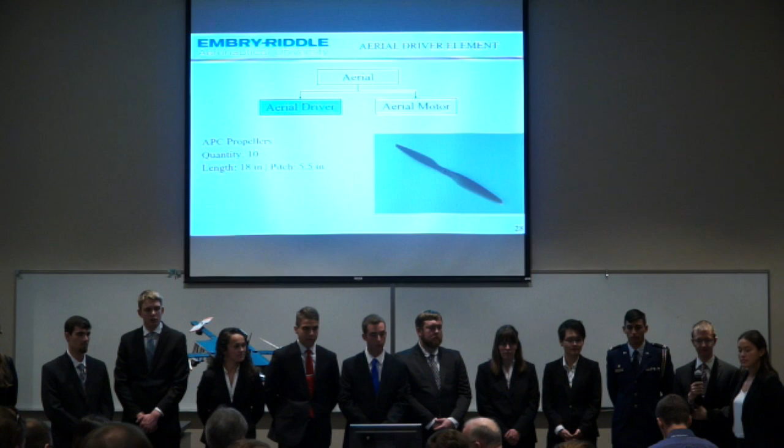Originally, when searching for wheels to meet this requirement, we looked at plastic wheels, but ultimately decided they would not have enough traction and also might be too weak when landing, because when this lands, it puts a lot more stress on the wheels than simply during driving. So it has to be able to withstand that, and it also has to be light. We can't make it out of solid aluminum, it would be too heavy to fly. For that reason, we designed these custom wheels. They'll be machined out of a solid piece of aluminum in order to have lightening holes and be mostly hollowed inside, so as to allow us to have a strong wheel that can withstand the forces of landing while still being light enough for the aircraft.

Okay, are one of you guys machining these wheels? No, our in-house machinist, Patrick David, is going to machine them. Okay, because I was looking at it and thinking these probably are not going to be cheap. So I was going to suggest, as a cost reduction, maybe continue to search for something you can get off the shelf, but if Patrick is machining it, that probably helps with your cost a whole lot. He's a good machinist, though, it'd be nice to him.